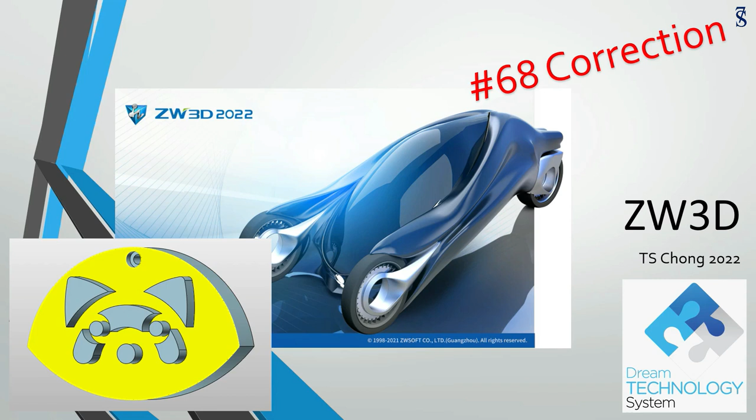As usual, we need to open the previous lesson file and continue what we're going to learn today. This is the result of the previous lesson. We have completed the nose area. We will continue using the similar method to duplicate the previous operation.

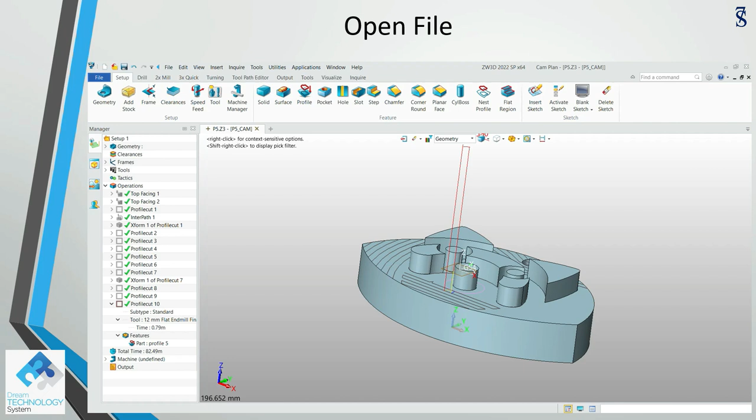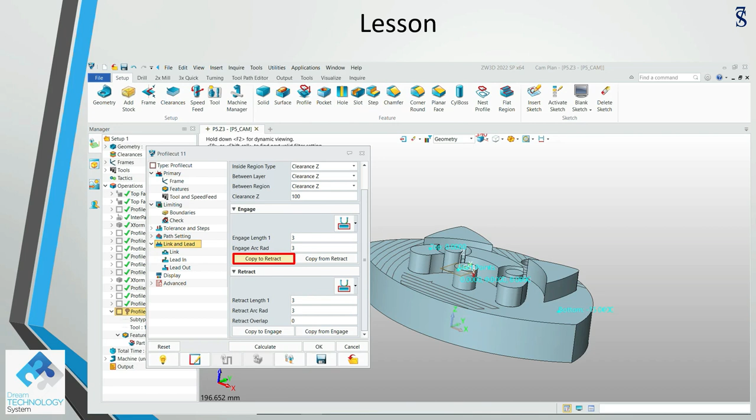Duplicate. Change the tool by selecting the 12 mm flat endmill final. Right mouse click, edit. Set the side and bottom thickness to 0. Base only. Copy to retract so that they will be exactly the same. Change the color. Calculate. Looks good.

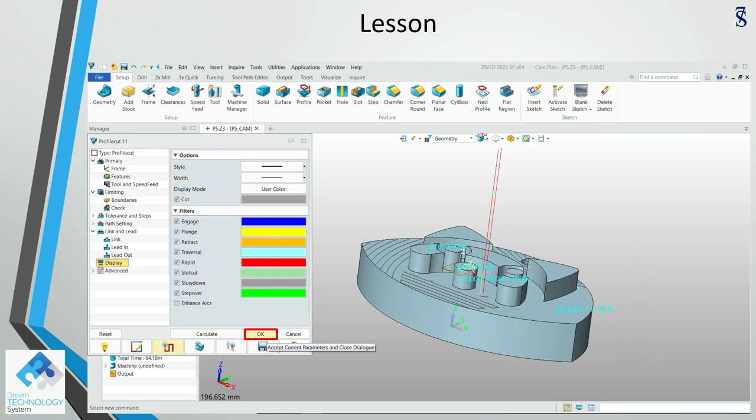Let us verify. Set the frame to G54. Drag the tool. Z-15. This is what we expected. Click OK. Click OK again. Let us perform solid verify. Option. Analysis visual. You can see that there is one dot there. Balanced material for us to fix. Close the window.

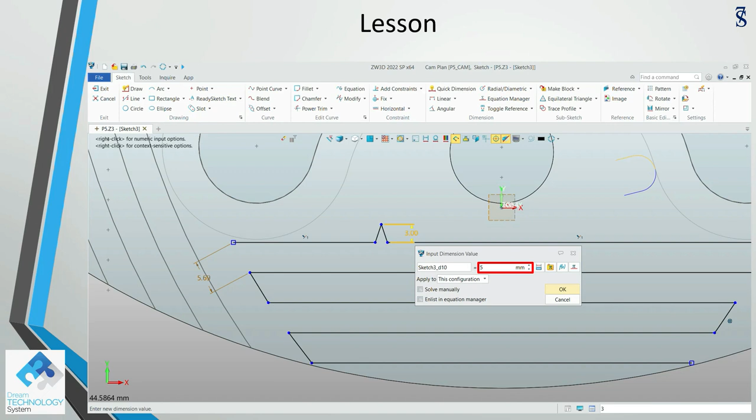Activate sketch. Click the sketch. Using the quick dimension, we can see that it is 3 mm from the bottom line. Change it to 5. Click OK. OK again. Exit the sketch. Perform a calculate all.

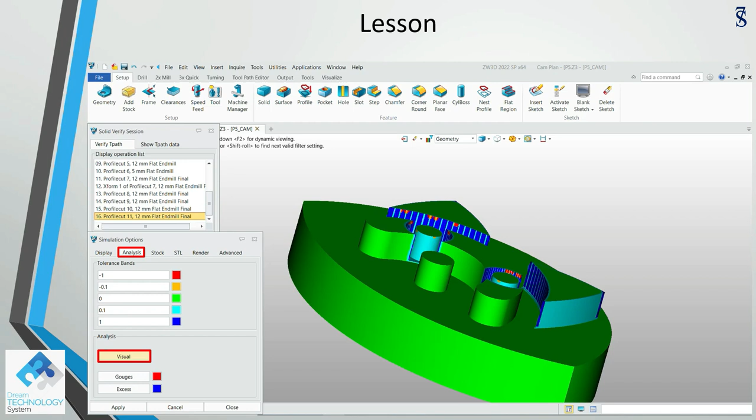Continue with solid verify. You can see there's no more balanced material after using the analysis visual. Save the file. Let me switch the screen to show you step by step how to accomplish the task.

Hello, welcome back. Let me show you step by step how to accomplish the task. First, we double click the previous operation, collapse it, right mouse click, duplicate, select, change the tool to 12 mm flat endmill final, right mouse click, edit,

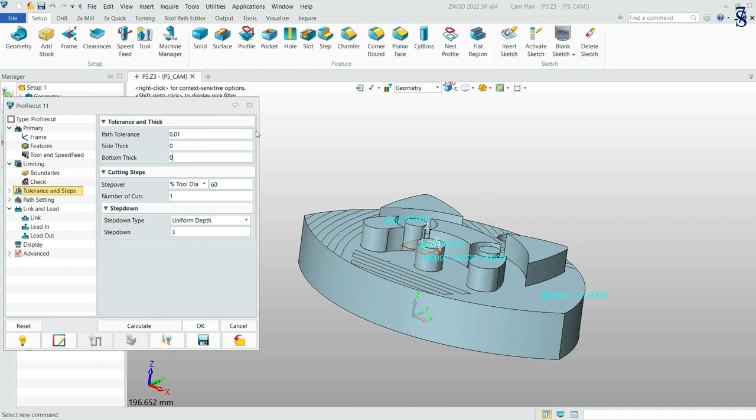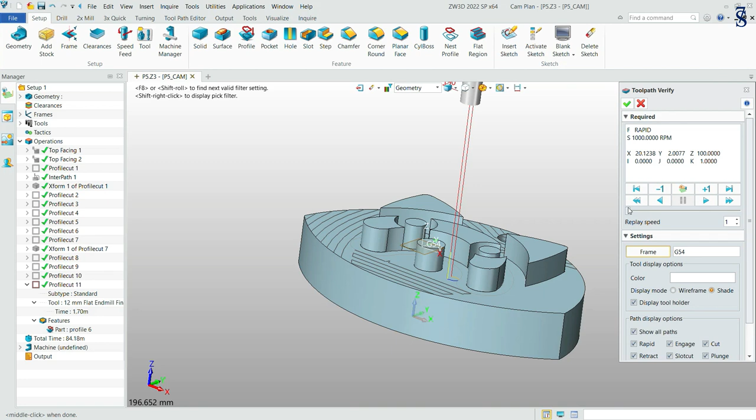set to 0, base only, copy to retract, change the color, calculate, looks good. Let us verify. Set the frame, G54, drag the tool, Z-15, correct, click OK, OK again.

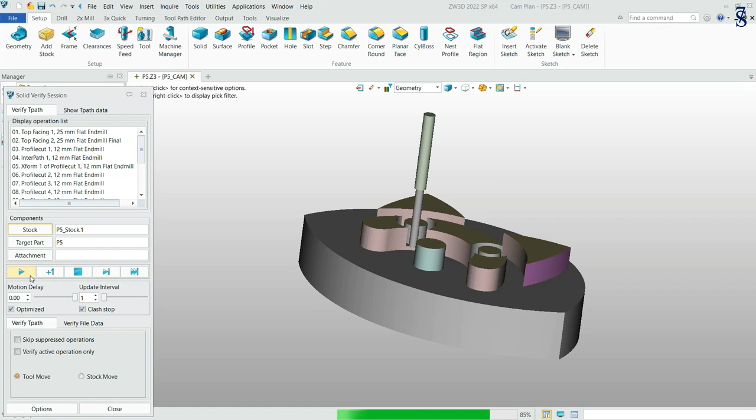Let us go into solid verify. I can play with the higher speed because I know that it will have an error. Yes, option, analysis visual. We have balance material for the finishing cut.

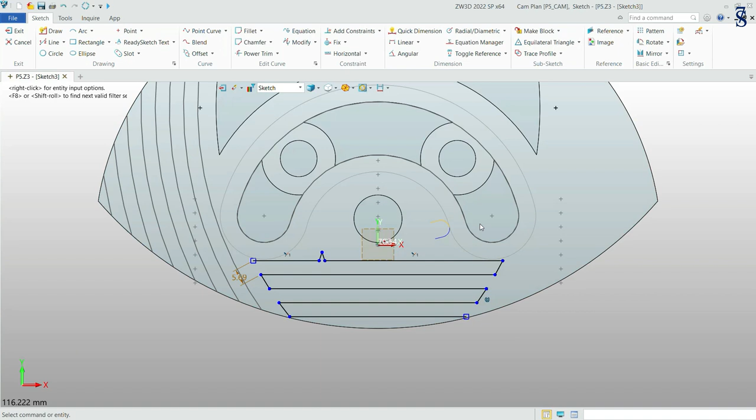Let us fix it. Activate sketch. This one, quick dimension, here to here, change to 5, click OK, OK, exit sketch, right mouse click, calculate all,

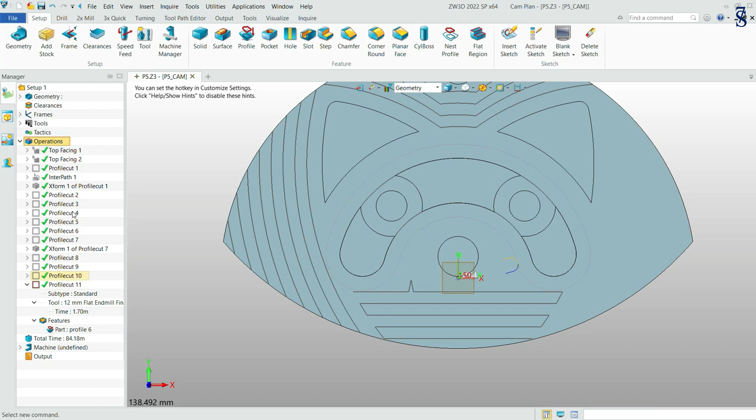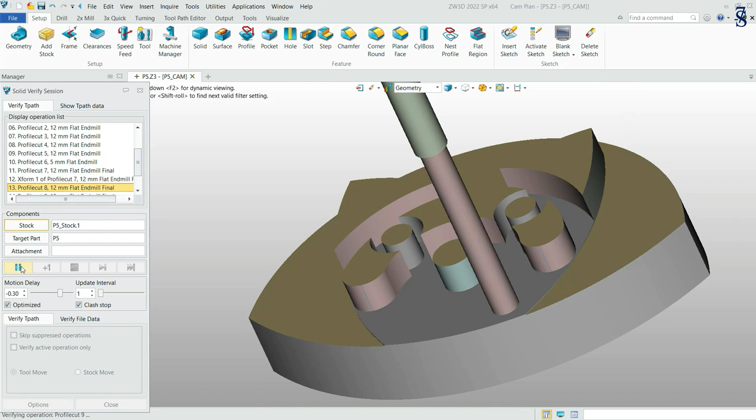perform solid verify. Let us tilt the part, slow down, play. Looks good. Option, analysis visual. Yes, this is what we expected. Everything looks good. Close, close. We save the file.